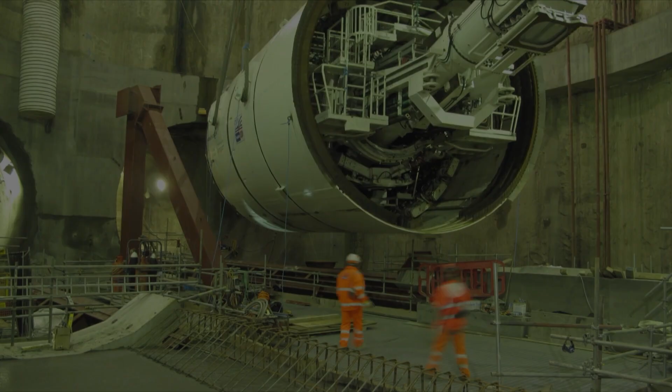TBM is used in straight tunnel sections, while SCL is used in curved or complex areas. But how can such large construction methods be switched in narrow underground spaces? TBMs are typically built to lengths of 16 to 100 meters and in special cases even over 120 meters. As the length suggests, TBMs are specialized for straight sections capable of excavating long, uninterrupted paths in a single drive.

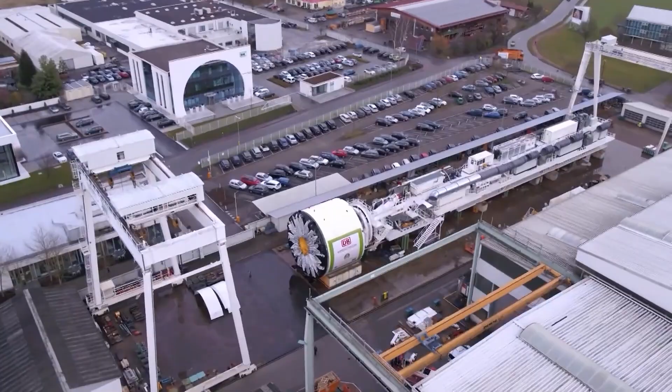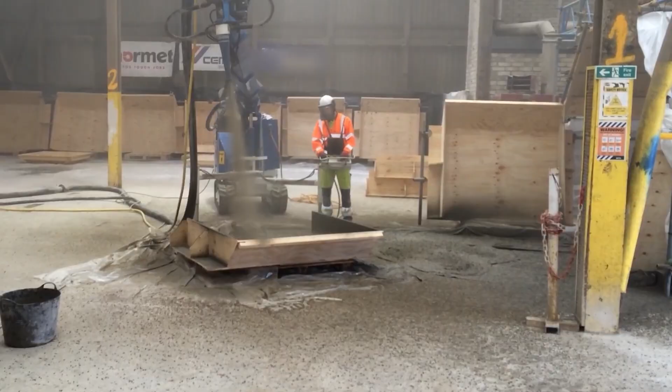However, this strength becomes a limitation in highly curved sections. Navigating tight bends with such a long machine is no easy task. In these areas, sprayed concrete lining SCL is required, as it is better suited for curved tunnel construction. It uses smaller, more flexible equipment that can be maneuvered more easily.

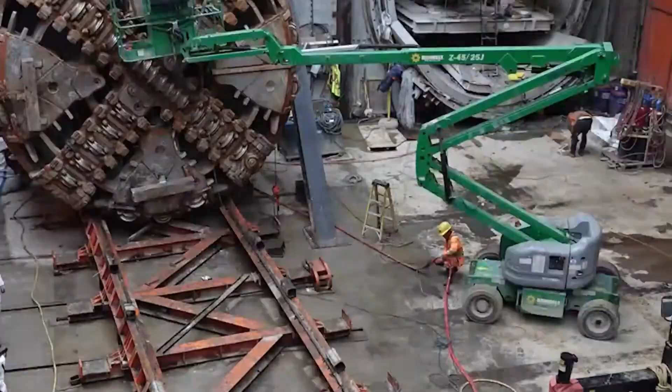To transition from TBM to SCL, the TBM must be disassembled at a shaft or chamber. Thanks to its modular design, the TBM can be extended or reduced relatively freely to suit the conditions. Based on the previous question, what we need to focus on is how to disassemble the TBM and introduce SCL.

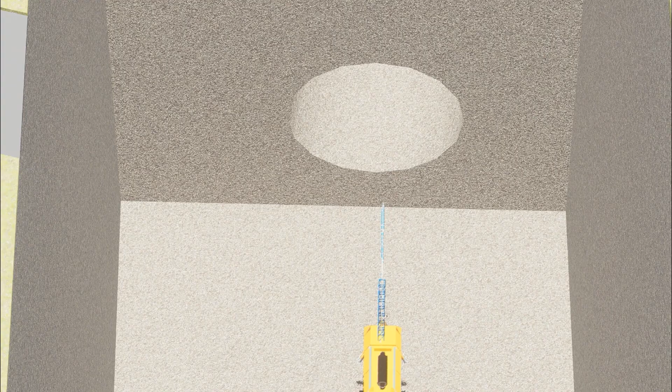First, the TBM is disassembled and pulled up to the surface through a shaft or chamber. Then, SCL equipment is brought into the same space. Since SCL is relatively small, it can easily be introduced. Once inside, the SCL method is used to complete the excavation of the curved section. After that, the SCL is removed and brought back to the shaft or chamber, where the TBM is reassembled and continues its work.

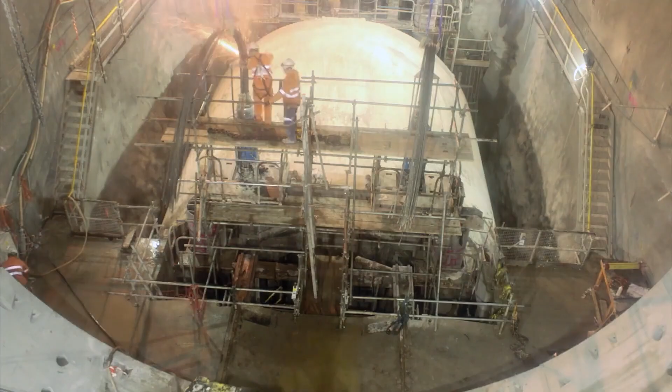However, if the process of disassembling and removing the TBM is not feasible or efficient, an alternative method is to permanently embed the TBM underground. This is particularly used in urban areas where the space is limited. In such cases, the TBM is permanently embedded at the end of the tunnel, a process known as TBM abandonment or the sacrificial TBM method.

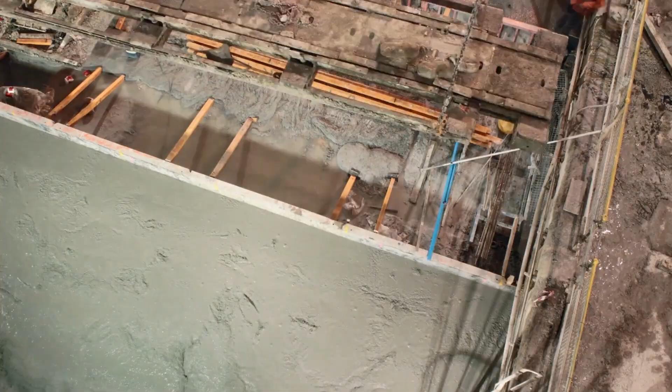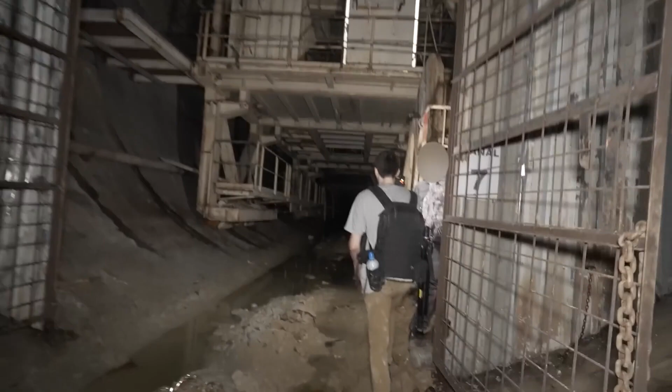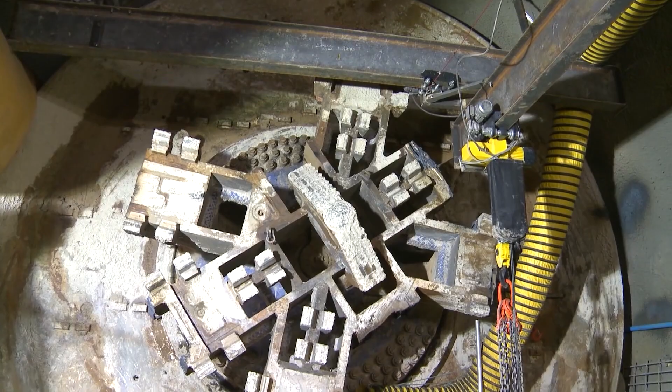The embedded TBM is fixed and sealed by filling the space between the body and the exterior with concrete, turning it into a closed-off area. As a result, it becomes part of the tunnel's end, completely isolated from the outside, making it inaccessible to trains or people. In fact, at Paddington Station, the steel cylindrical structure known as the shield, which is difficult to move, was buried in the ground. Parts of the TBM that were modular and easier to disassemble and remove were separated and taken out.

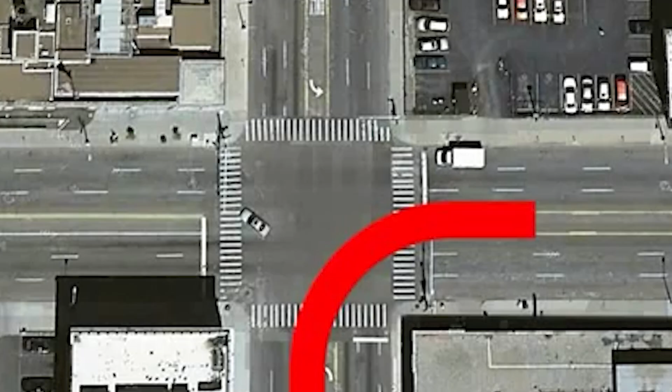Another exception is that TBMs, while specialized for straight sections, are not completely incapable of passing through curved sections. The ability of a TBM to navigate a curve depends on the radius of the curve and the size of the TBM. While TBMs are equipped with mechanisms that allow the machine to rotate in the direction of the curve, they can only pass through curves with a minimum radius of 150 to 200 meters. In cases of tighter radii, it becomes difficult for the machine to change direction.

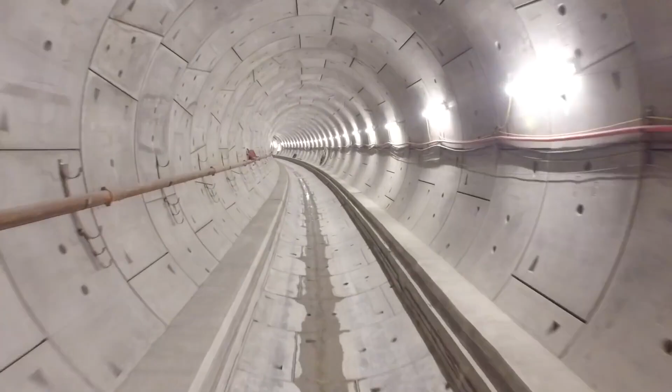In the case of London's Crossrail project, some TBMs were able to pass through the curved sections as a minimum radius of 200 meters was available, allowing the work to proceed. After the TBM reaches a station in the shape of a concrete box, one method is used to move the TBM to the opposite tunnel across the station.

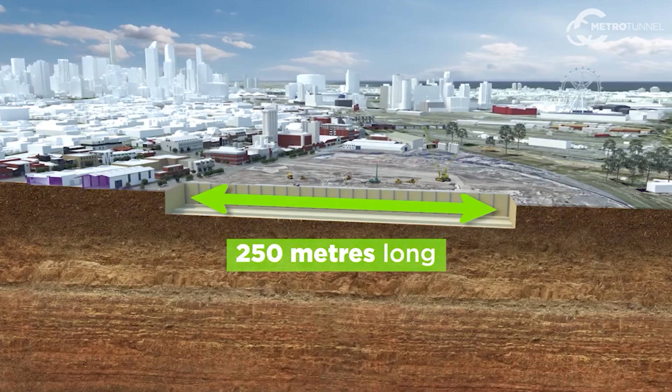In the process of tunnel boring, there are cases where the station box is constructed first, and other cases where the ticket hall is built after tunneling. Canary Wharf Station falls under the category where the station box was constructed first and the TBM passed through afterward. So, the TBM had to travel about 250 meters inside the station.

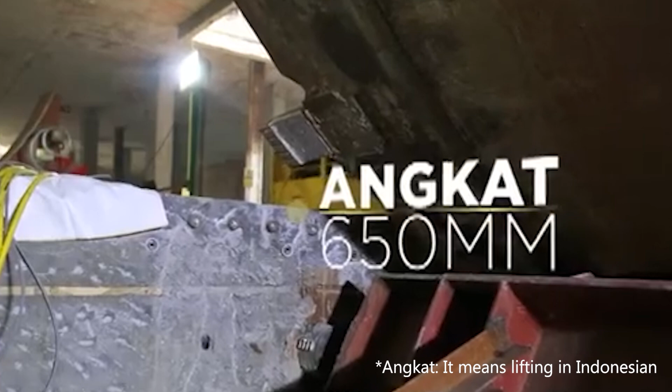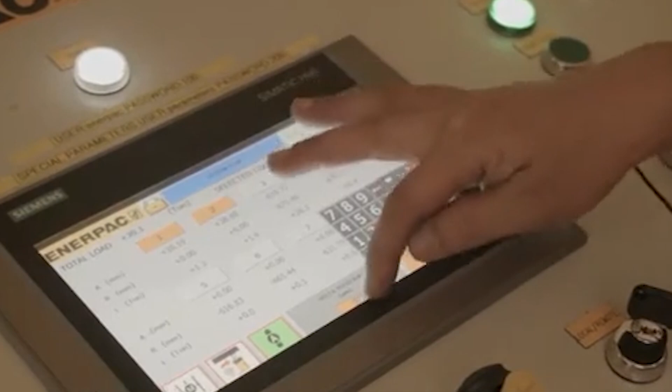In this case, there was a height difference between the station box and the station floor, and to overcome this, a lifting bracket was used. The lifting bracket is a horizontal sliding support system that assists the crane in moving the TBM. It lifts the TBM body and helps it move to the next position. It also distributes the weight of the TBM efficiently, ensuring that the TBM load is not directly transferred to the station structure.

Let's dive into this week's topic, the complex process of managing a project involving multiple fields.

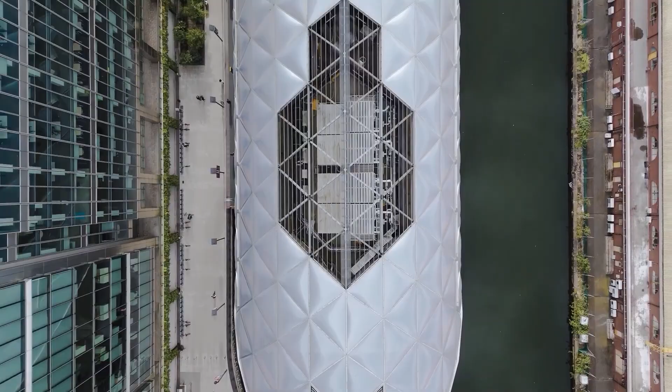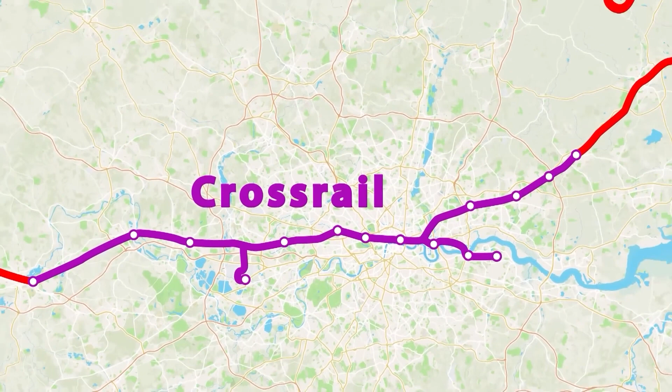The construction of the Elizabeth Line involves not only many incidents and delays, but also carries significant historical value. As this line stretches across cities from east to west, the process of digging beneath the surface also revealed parts of each city's past. In total, over 40 significant archaeological discoveries were made.

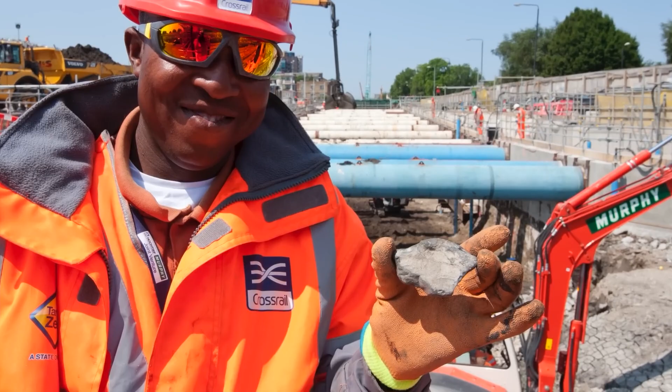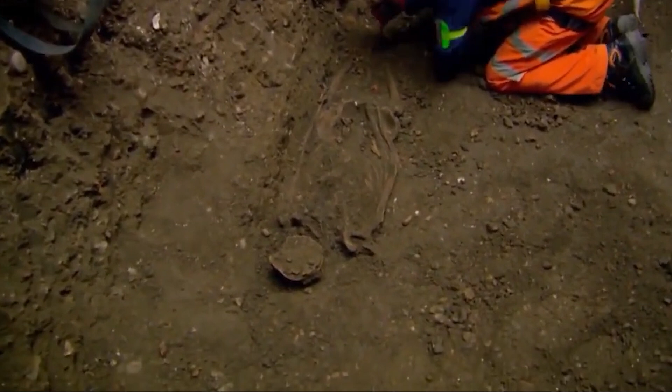In West London, prehistoric settlements were uncovered, and near the Farringdon station in East London, the remains of 25 victims of the Black Death were found. These are remnants of a darker past discovered by engineers digging tunnels next to Charterhouse, a Tudor-style mansion built on the site of a 14th century monastery.

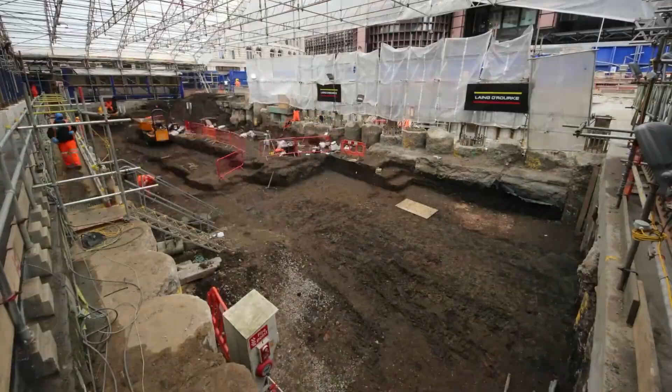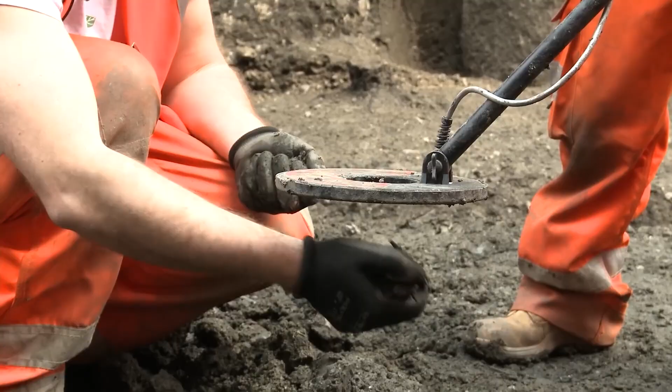At Liverpool Street, remnants of the city's defensive walls and various roads from a London settlement that housed around 60,000 citizens over 2,000 years ago were uncovered. These human remains, discovered during the construction process, are invaluable assets to the local and national history, and as such, required further investigation by archaeologists. In some cases, this investigation took up 22 weeks, causing unavoidable delays.

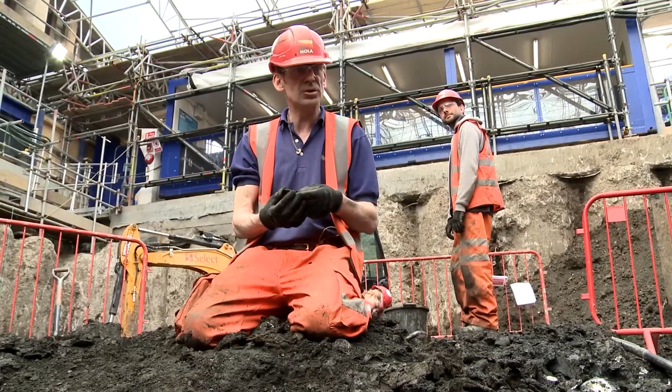This highlights how the process of building a structure is not just about architectural engineering, but also about the collaboration of many different experts in related fields. Next, let's discuss the area of contracts. The construction of the Elizabeth Line, like any large-scale project, involved a complex contract structure with numerous stakeholders, creating a multi-contract environment. This brings us to the third issue.

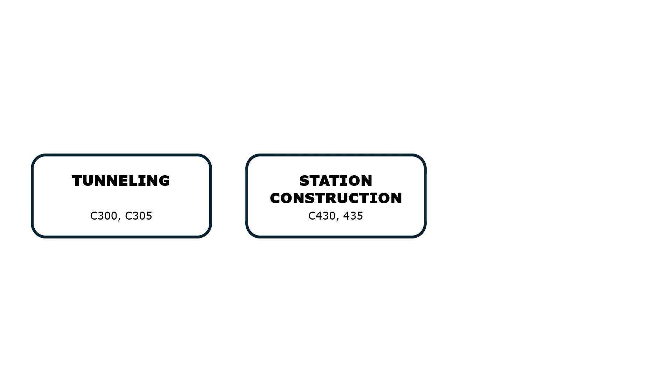The Crossrail project was made up of 63 major contracts, each closely interconnected. Due to coordination issues between interfaces and unexpected site conditions, there was a high likelihood of delays. As a large-scale project, the construction was divided into various categories, such as tunneling, station construction, system installation, and general civil works. Notable contracts included C300, C305 for tunneling, C430 and C435 for station construction, and C610 for system installation.

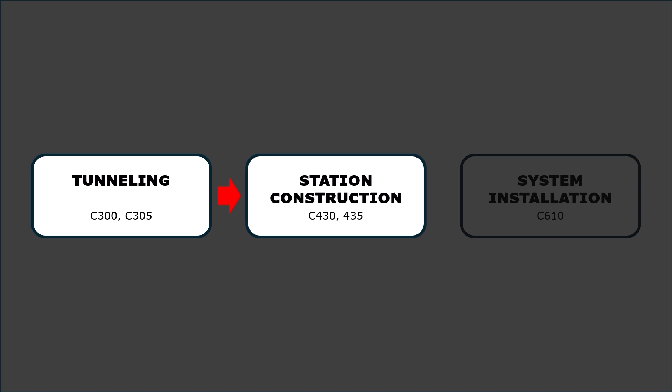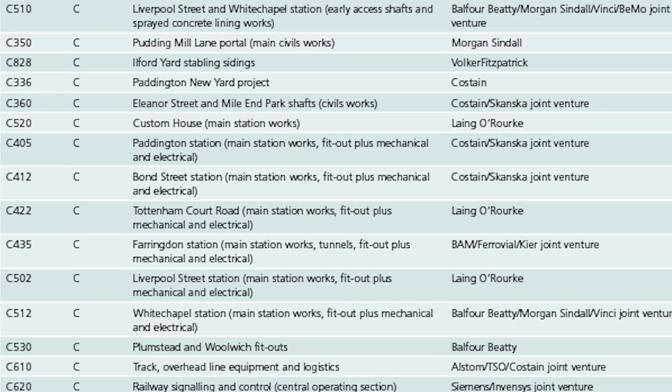During the construction process, tunneling had to be completed before station construction could begin. However, delays in tunneling pushed back the station construction schedule as well. Additionally, different contractors were involved in each contract, making coordination between works challenging. Inefficient communication ultimately led to further delays.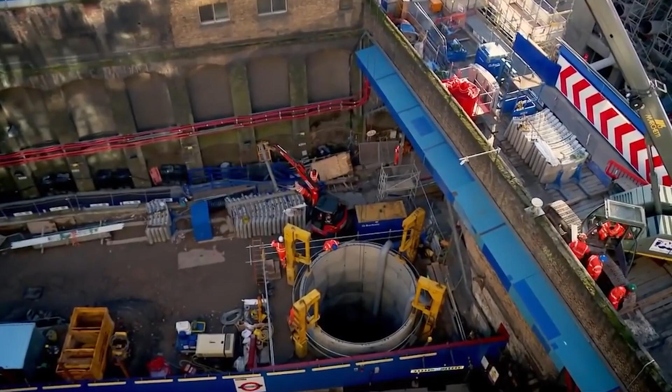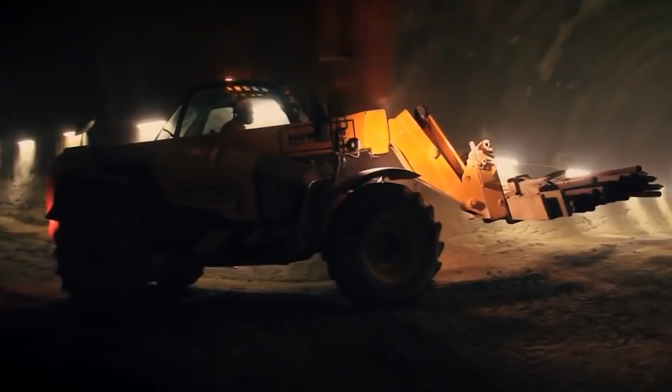For example, at Farringdon Station, tunneling and station construction were carried out simultaneously, but the lack of sufficient communication and coordination led to unexpected issues. The delay in completing the Western Tunnel prevented the delivery of materials and equipment for the station construction. Since both the tunneling and station construction equipment had to use the same access route, the overlapping work schedules caused inefficiencies. And also, the Farringdon area itself was narrow and complex, limiting the space available for equipment placement and material movement.

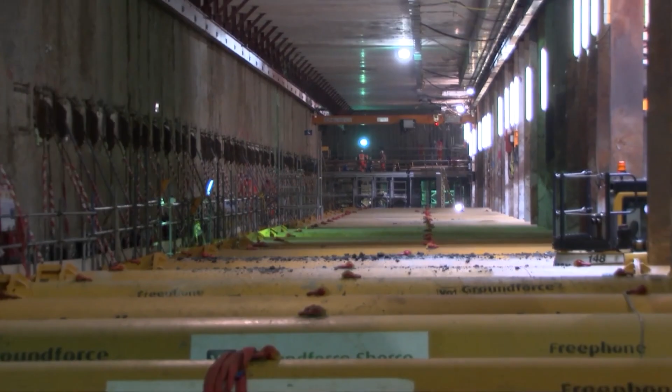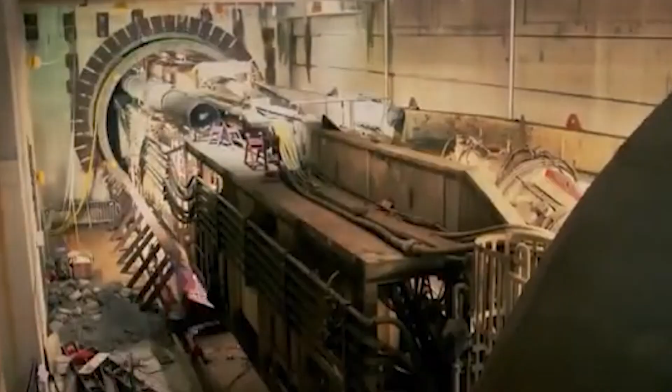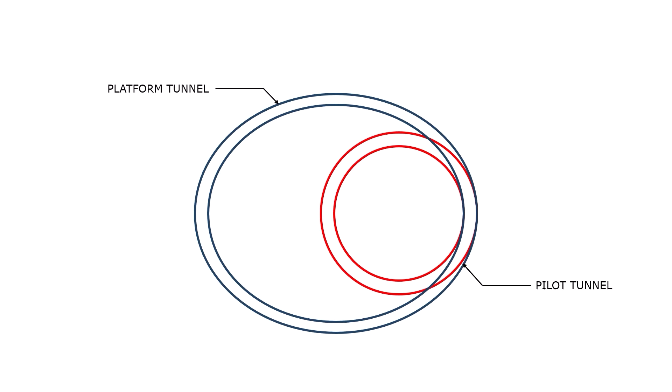The original design required the full 500-meter platform tunnel to be constructed before the TBM's arrival. This posed the risk of delaying TBM excavation and required relocating the machine using lifting brackets or similar equipment to the next drive. Instead, the contractor BFK proposed an alternative approach to first excavate a pilot tunnel using the TBM and then widen it into a full platform tunnel. This ensured that the two operations did not interfere with each other, allowing the project to proceed smoothly.

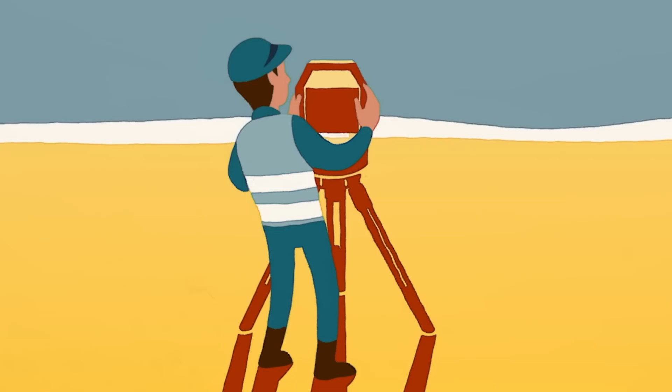Meanwhile, another unexpected situation occurred at the Thames Tunnel. This tunnel, which passes under the River Thames, faced unexpectedly high water pressure, causing excavation work to halt. The initial groundwater level predictions were inaccurate, leading to water seeping into the tunnel, which made it impossible to carry out waterproofing work.

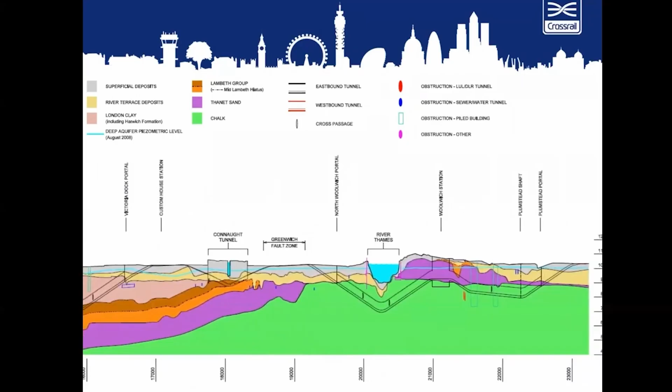These locations were all situated within weathered chalk layers, characterized by heterogeneous ground conditions, including numerous orthogonal joints and flints. Due to these conditions, it was not feasible to perform waterproofing operations in parallel with the TBM excavation. Therefore, ground pre-treatment was required prior to full-scale excavation.

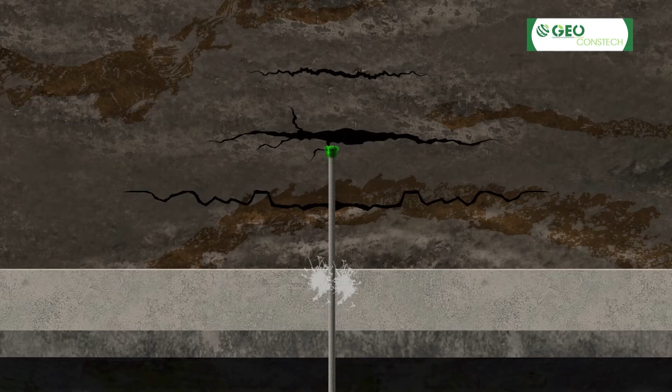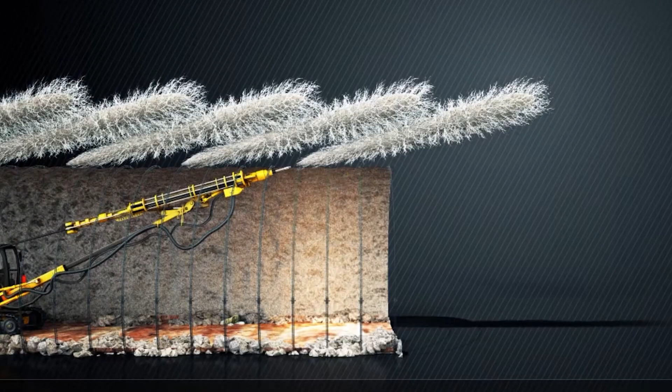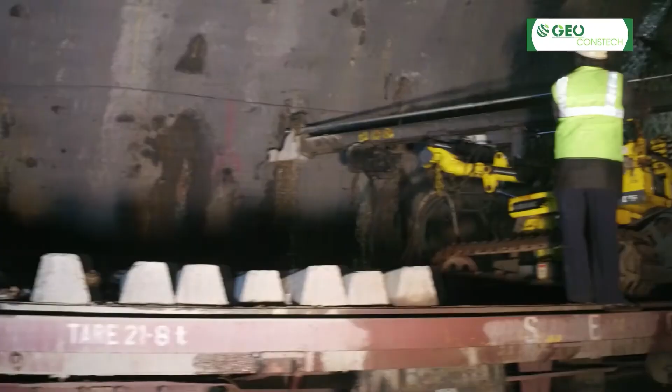To block groundwater inflow and ensure excavation stability, the Crossrail team employed tube-a-manchette grouting methods, using microfine cement around the cross passage areas. Additionally, due to the low strength of the upper chalk layer, grouted glass-reinforced plastic dowels were installed to further reinforce the ground. As a result of the grouting, the permeability coefficient of the ground was reduced below the target level, and groundwater inflow was effectively blocked in most sections.

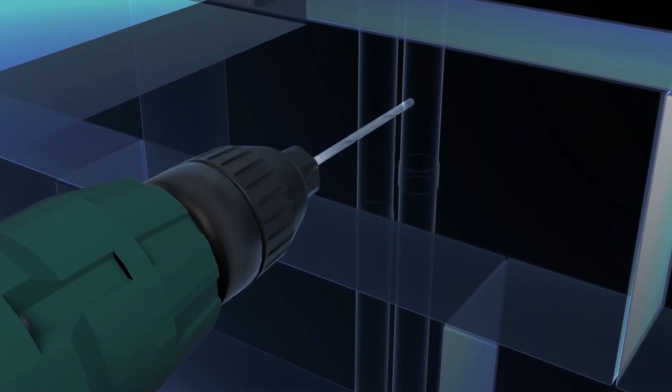This issue also impacted the installation of the power systems, which could only proceed once the tunnels and tunnel walls were completed. With delays in the waterproofing work, the power system installation was similarly delayed. Particularly, the suspension of track and power wiring work caused delays in the subsequent signal system installation. Of course, the installation process itself also had difficulties, further complicating the timeline.

The Elizabeth line had to integrate 3 different signaling systems: ETCS, CBTC, and TPWS. Compatibility issues between the CBTC and ETCS led to errors between the train software and signaling systems, causing significant delays in resolving these problems. To address these, CBTC, which is used for urban areas, was integrated first to ensure stable operation in the central underground sections.

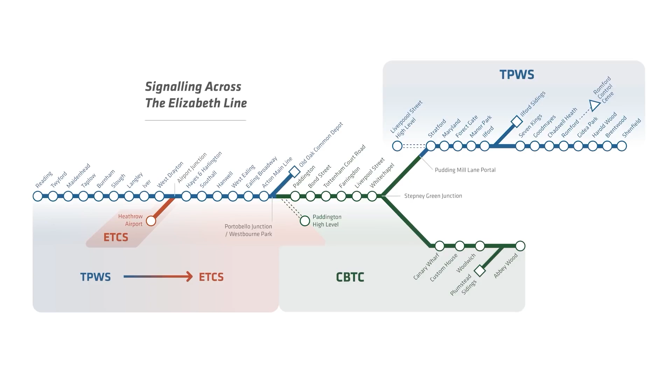ETCS, the high-speed signaling system, was prioritized later and gradually stabilized after the line opened. To prevent issues where trains might stop due to problems with signaling switching, a reset function was introduced, allowing operators to quickly restore the system through manual intervention.

The final consideration category is finance. Finance is the key pillar that holds the beginning and end of construction. As much as the process stops when the flow of money stops, it's a critical issue that determines the overall project. The Crossrail project utilized a public-private partnership model, where public and private entities collaborated to secure funding and facilitate the construction of certain sections of the project for the public benefit.

Some sections were built through direct investment by real estate developers and private companies. A prime example is the Canary Wharf Group, which contributed £150 million towards the station's construction. In return, they developed commercial space and a park above the station, generating rental income. This included 100,000 square feet of commercial space and rights to a rooftop park. It was a typical PPP model where a private company built public infrastructure while also generating revenue through commercial space.

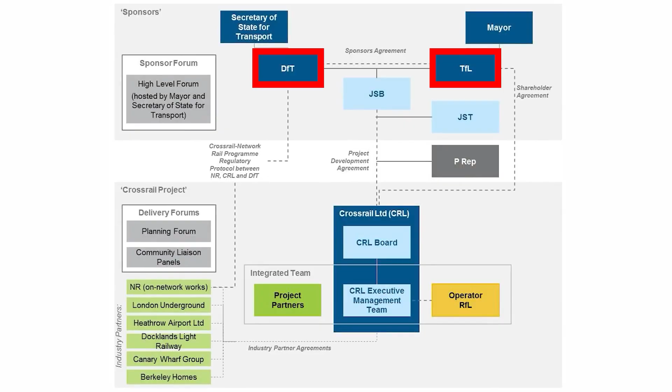Particularly, private investment was encouraged around station areas where development purposes were clear, aiming to create a win-win situation by offering private companies opportunities to generate income. However, due to the nature of public transport infrastructure projects and the lack of a clear mechanism for directly recouping profits, this approach did not yield the expected results. As a result, the majority of the construction costs were borne by public institutions such as the Department for Transport and Transport for London.

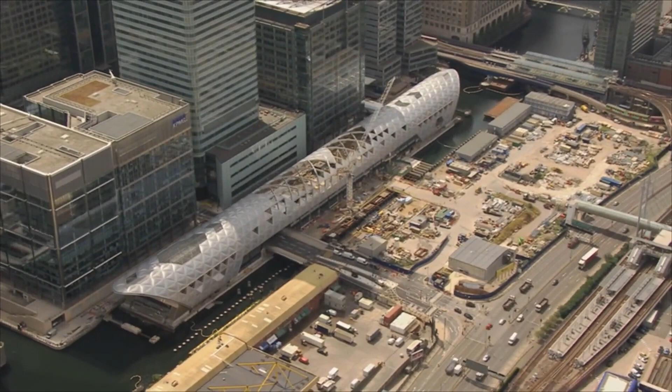As a large-scale project, there are so many different fields. Complexity, issues, and delays were proportional. With so many issues and long delays, the construction of the Elizabeth line, including the completion of the station at Canary Wharf, inevitably led to significant financial losses. The initial construction cost of £14.8 billion ballooned to £17.6 billion and ultimately reached a staggering £18.8 billion. After all, process management is not just a matter of time, but also directly a matter of cost. In a world where one-day delays cost hundreds of millions of won, contractors cannot relax for a single day.

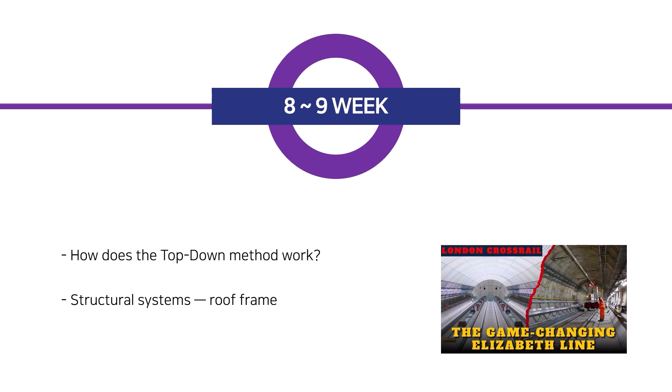This week, we covered issues related to contracts during construction, delays in the integration of the signaling system, and the resulting cost problems across the Crossrail project. Next week, we will focus on the construction process of Canary Wharf Station, discussing the construction of the cofferdam built over water and how it differs from typical station construction. In weeks 8 to 9, we will cover the construction methods used after the cofferdam, including the building of the roof garden and the structure and materials of the roof. Finally, in weeks 10 to 11, we will conclude the presentation by telling the overall story of our building.